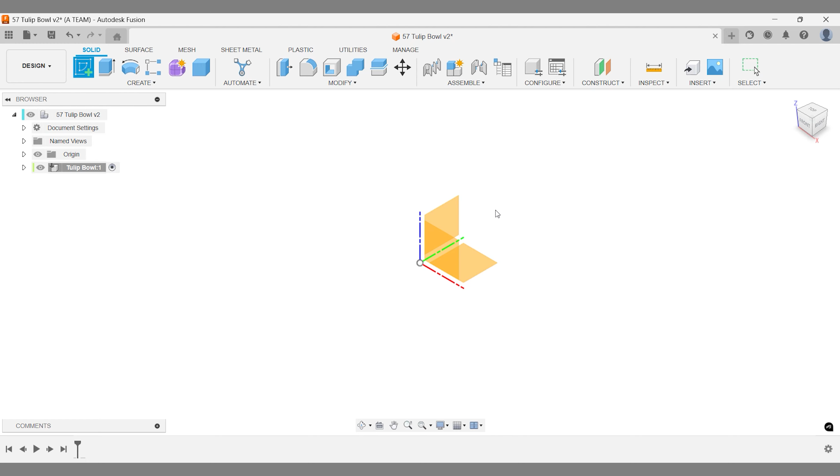A center diameter circle at the origin is the perfect foundation. I'm making a small bowl with a 100 mm diameter, but feel free to adjust the size to suit your needs.

Instead of a thin extrusion, I'm using a standard extrusion with a 15-degree taper. This keeps the workflow intuitive. Press Enter to confirm when you're happy with the settings.

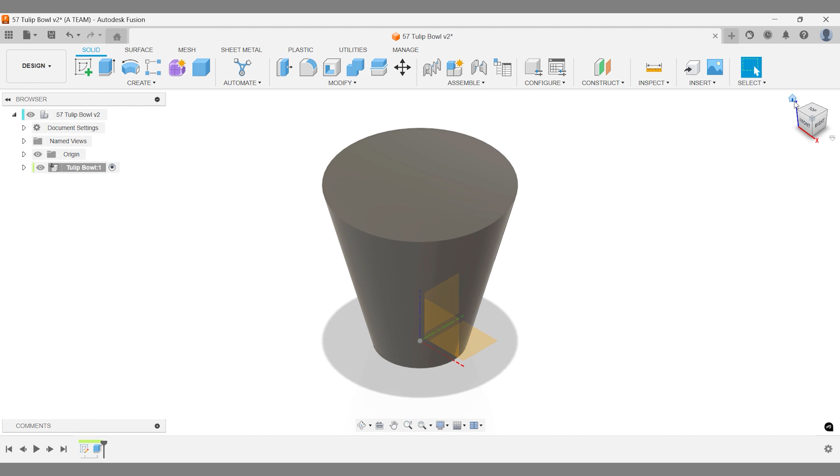Use the Shell tool in the solid modeling workspace and set a thickness that ensures a strong 3D print. Make it thick enough for durability, but not so thick that it wastes material. You'll need to remember this value or set up a custom user parameter since we'll use this thickness again later in the design.

Think of this offset plane as a tool. The exact measurements aren't critical. Just position it to keep your model clean, organized, and professional.

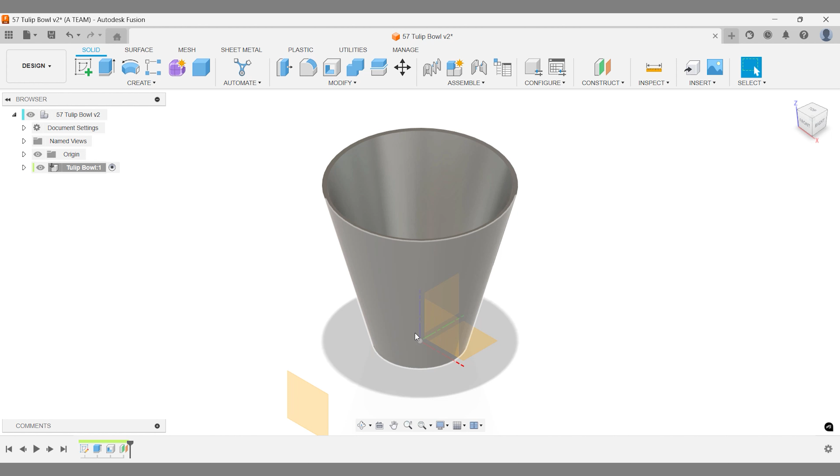Great 3D modeling is about precision, but maintaining a well-structured design file adds a touch of class and quality to your workflow. You can sketch your own shapes, but I'm supporting someone else's work by using a licensed SVG file for this vase.

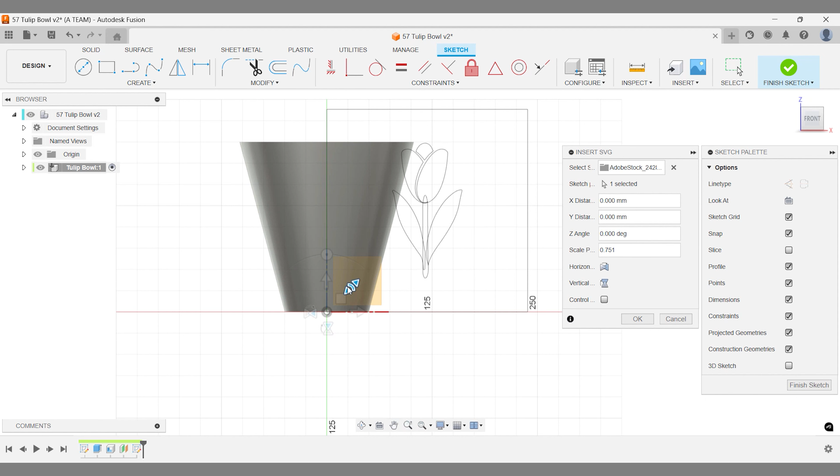I've noticed that many of the SVG files I import come in upside down, but that's easily fixed with the flip button. I'll size this based on my instincts, but thanks to Fusion's parametric design, we can always revisit this step through the timeline if we need to adjust the exact dimensions later.

The goal here is to add the shapes to the vase, then remove parts to achieve the look shown in the video thumbnail. The green color on the sketch indicates that it has a fixed constraint, but we won't need to focus on that in this Fusion tutorial.

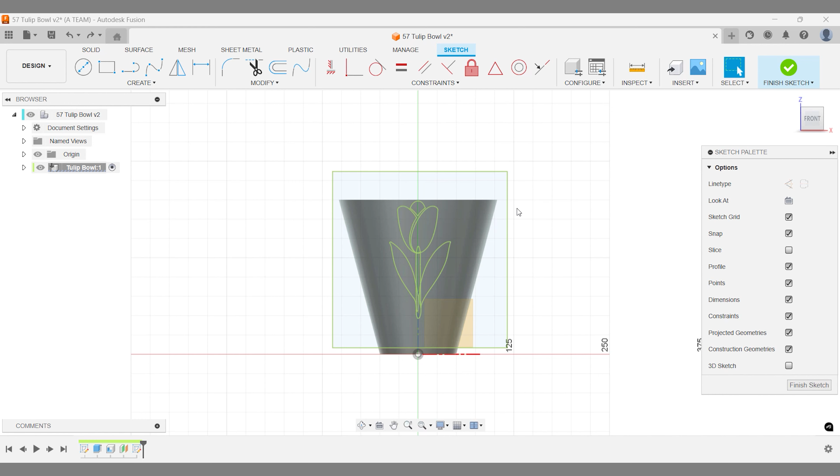We'll use Extend to fix the tulip, bringing it together as one solid part. I highly recommend using a mouse with a scroll wheel, as it makes zooming in and out much smoother.

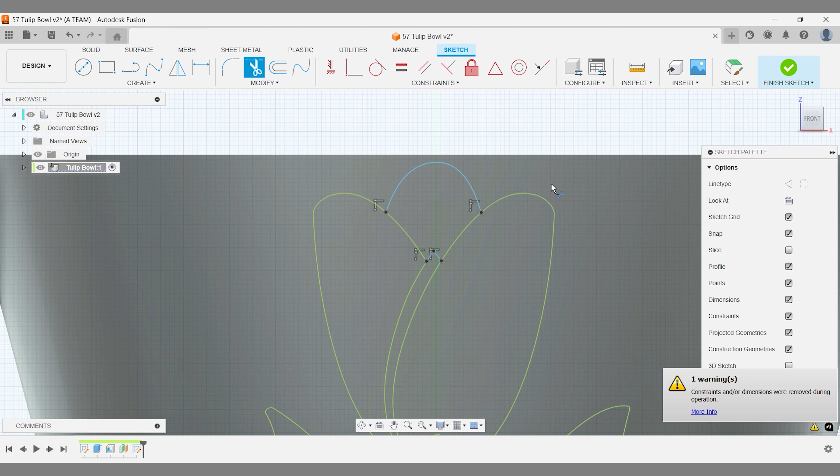Once we've extended the new lines to other parts of the flower, we'll use the trim tool to remove the unnecessary lines. I often check the view from the view cube to get a better sense of how things are looking, and we're definitely making great progress here.

Choosing the entire tulip sketch in one move is faster, but selecting the areas one by one gives us more faces to work with when we apply colors later on.

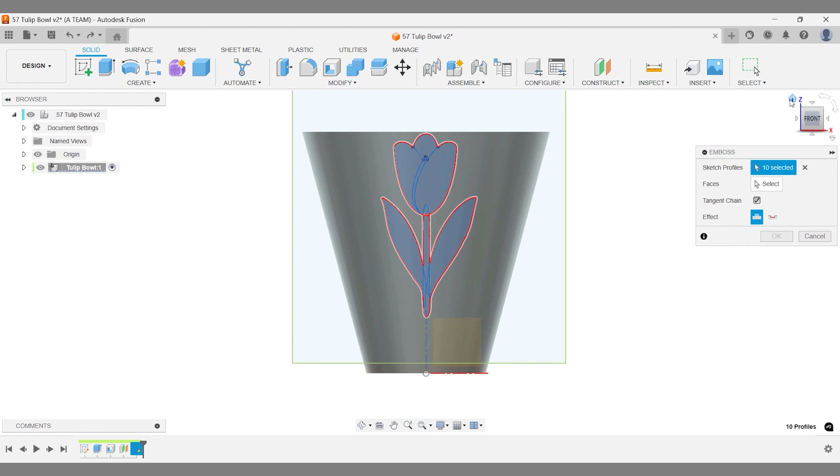Emboss will make the sketch stand out from the vase, while deboss, a popular option in many designs, will lower the sketch into the vase. The emboss command with the 2 mm emboss worked perfectly, and now the tulip stands out nicely from the vase.

Make sure to set the circular pattern to feature before trying to rotate it around the design. Otherwise, it'll be tricky to select the tulip.

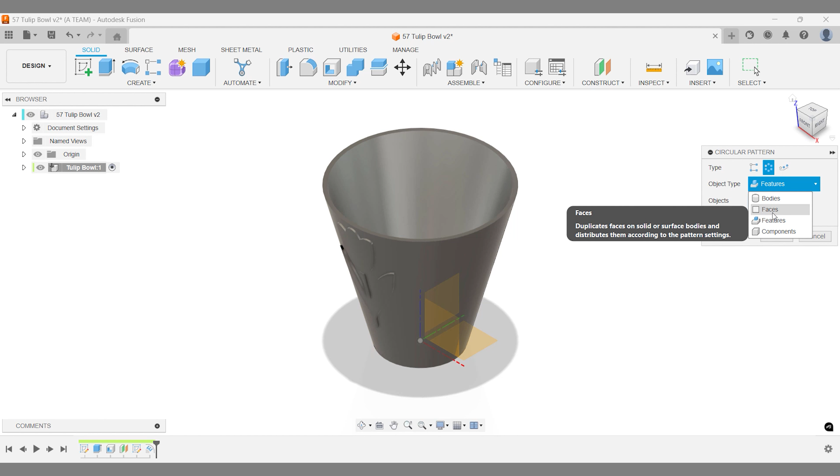I mentioned earlier that the origin is the perfect starting point, and now we can see why. It's the ideal axis for creating the pattern.

Press and hold the left mouse button to open a menu that lets you select items at depth behind other possible selections. This saves you time since you don't need to twist the model into awkward angles or toggle visibility to find what you need.

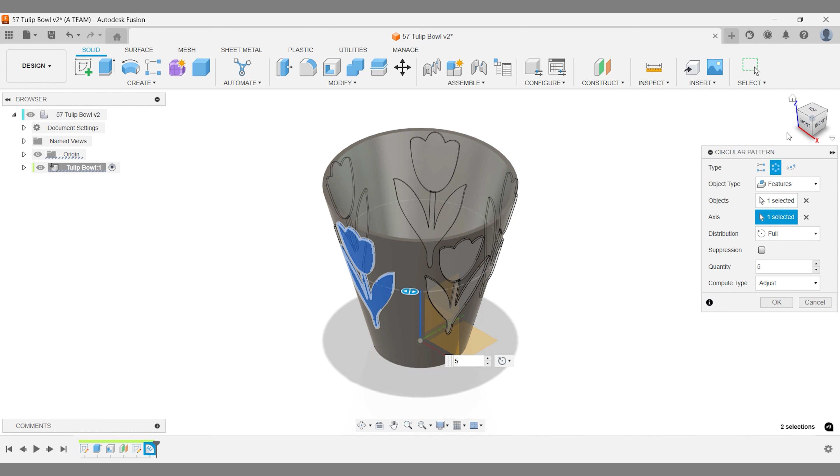The default quantity of 5 tulips looks great, so I'll keep it simple and press OK. Let's take a look at our work from the view cube. We'll create a sketch to remove parts of this tulip bowl.

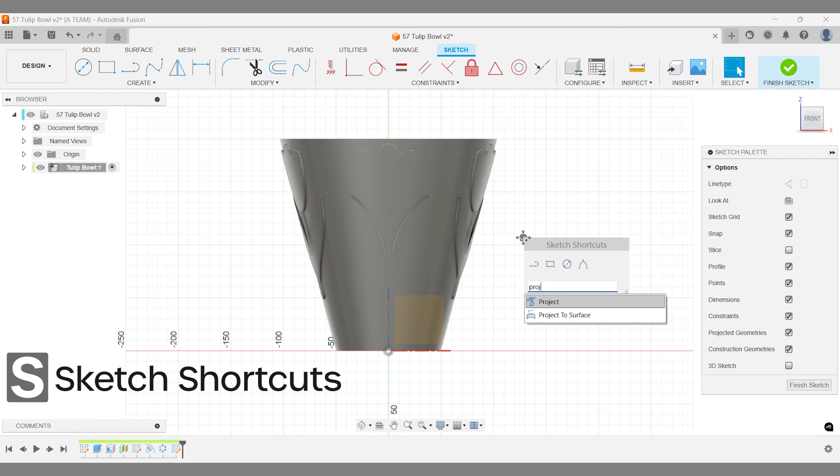As often in Fusion, we'll start with a predefined construction plane and then use Sketch Project to create a sketch on it. The default settings work fine, and the purple lines indicate that the projection is linked to the original body.

We don't need all the projected geometry, so we'll turn off the body's visibility. This makes it easier to select and delete the extra projected tulips.

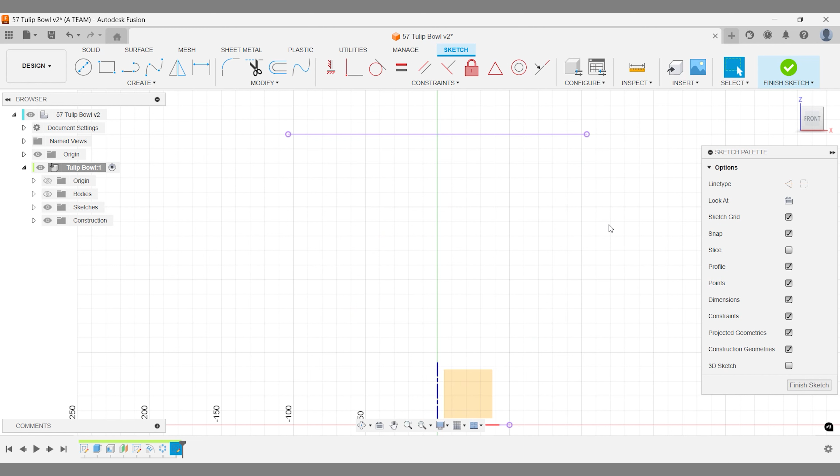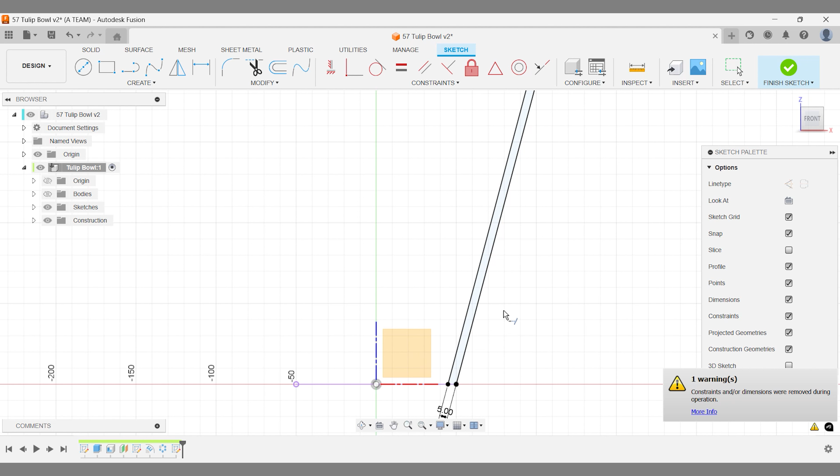Next, we focus on the outer boundary of the projected vase. We connect the necessary points and offset the line using the same distance as the shell operation from earlier. To prepare for the next steps, we need a closed profile. We do this by extending the sketch line until it meets the horizontal line at the vase's projected bottom.

Now, turn the body's visibility back on for a quick visual check of the sketch's positioning. Next, place a horizontal line where you want to cut off the upper part of the sketch. I'm placing mine where the tulip stem intersects the leaf.

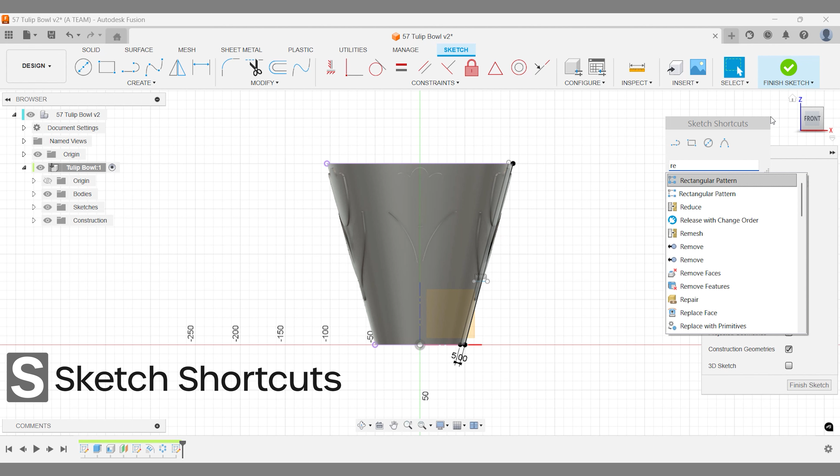With everything set, we're ready to revolve the profile around the central axis.

If needed, press and hold the left mouse button to bring up the selection menu and choose the correct geometry. Press OK to confirm the revolve cut operation and remove the highlighted red area.

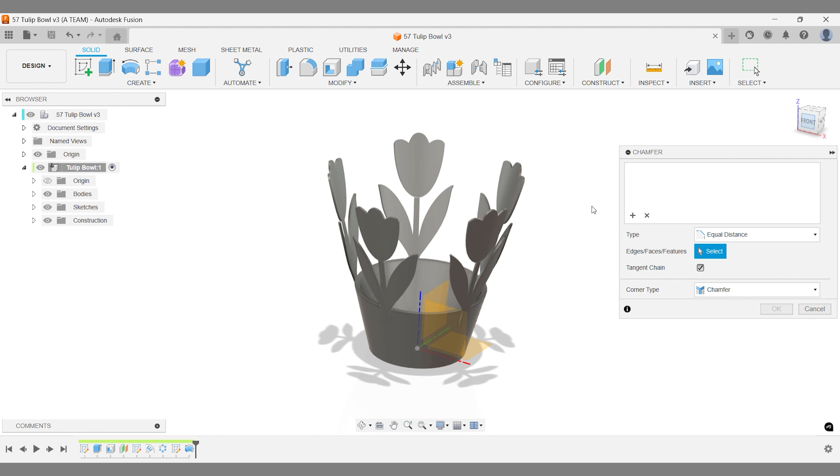Applying chamfers before adding appearances gives you distinct faces, making it easier to apply colors and finishes. Beyond aesthetics, chamfers and fillets improve durability and create a more user-friendly design by softening sharp edges. The details make all the difference.

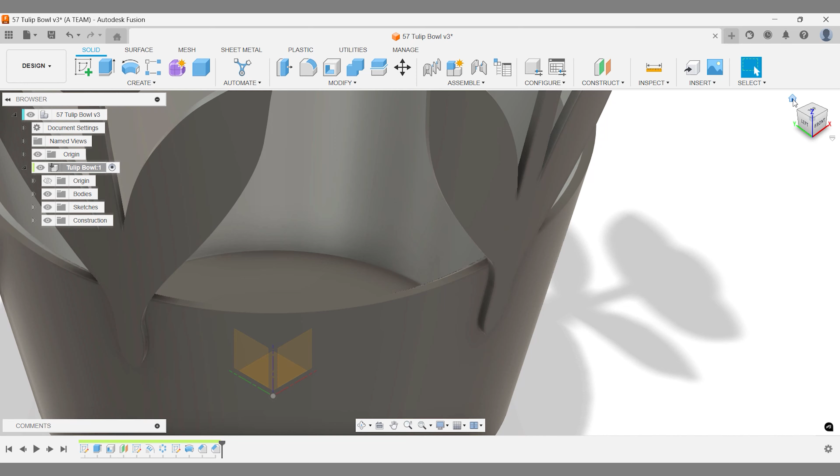The vase has a 5 mm wall thickness, giving me some margin without pushing the limits with this 3 mm chamfer. Even though it's relatively small compared to the bowl, the chamfer creates a distinct detail where the bottom meets the side.

I'll highlight the key takeaways from applying custom appearances, then skip ahead. No one wants to watch every detail of the process.

As you'll see in the popular tutorials linked at the end, I often recommend applying appearances before creating patterns. This saves time and reduces manual adjustments.

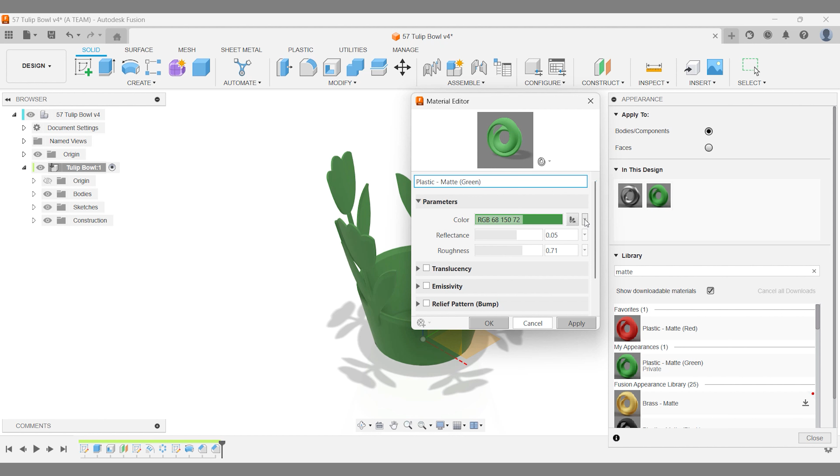For this vase, I'm using a plastic matte green as the base color, then refining it with a custom hex code from a color palette found online. Duplicating your selected color makes it easy to maintain the matte base for the next shade.

Finding color palettes online was a game changer for me. There's plenty of great info on colors that complement each other.

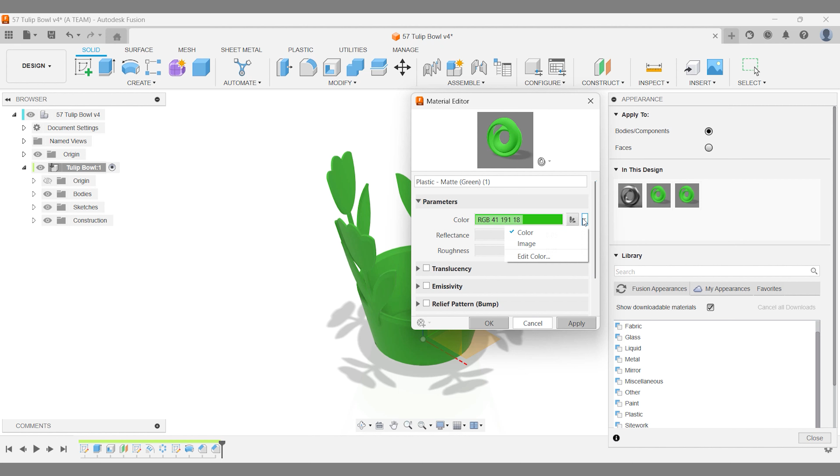Before applying this color to the top of the tulips, we'll need to switch the setting to faces.

That's the main takeaway for adding appearances in this Fusion project. Apply appearances before creating patterns, use online palettes for better color choices, and adjust settings for precise application.

With that covered, let's jump ahead to rendering the colored bowl.

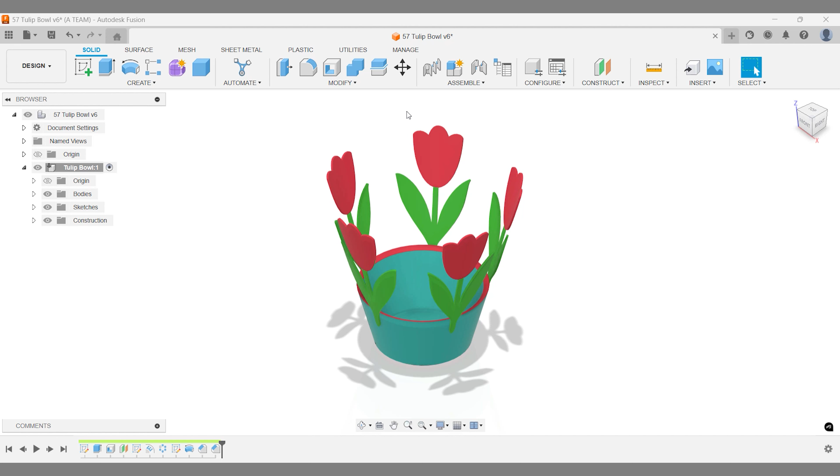Change to the render workspace from the top left corner. Right-click the canvas and open Scene Settings.

The default presets work well, but switch the background from solid color to the Photobooth environment for better lighting and color capture.

Hold the mouse wheel to pan and find the perfect angle.

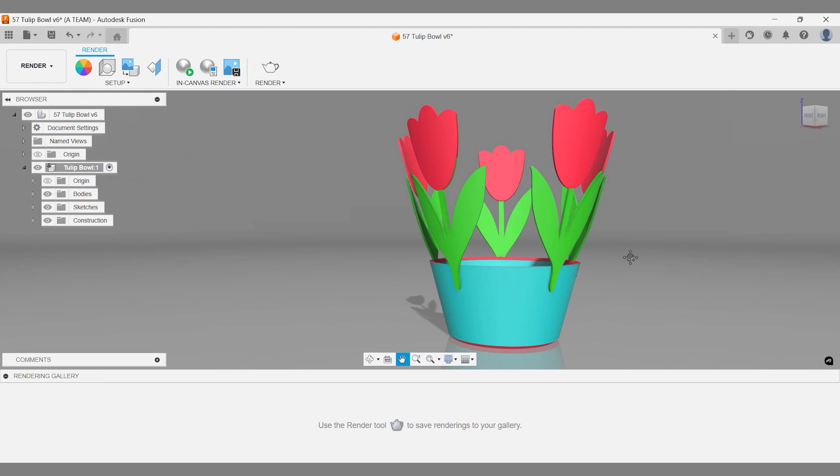Adjust the width and height ratio if rendering for a specific format, like video or an online store.

I fired up 2 more renderings, making it three running simultaneously. It saves time, and as anyone who's taken photos of their girlfriend knows, more shots mean a better chance of success. And a happy customer.

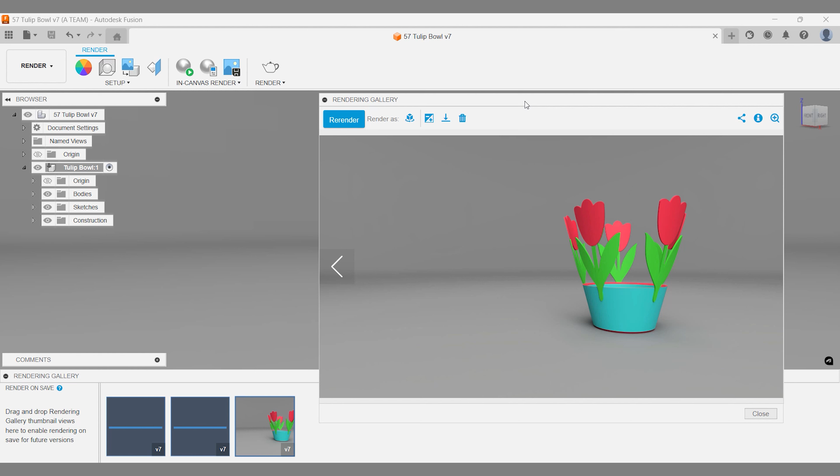Some might ask, why not create the tulip as a separate body, position it on the bowl with the joint, and then use a circular pattern? That works too. One of Fusion's strengths is that multiple workflows can lead to the same result.